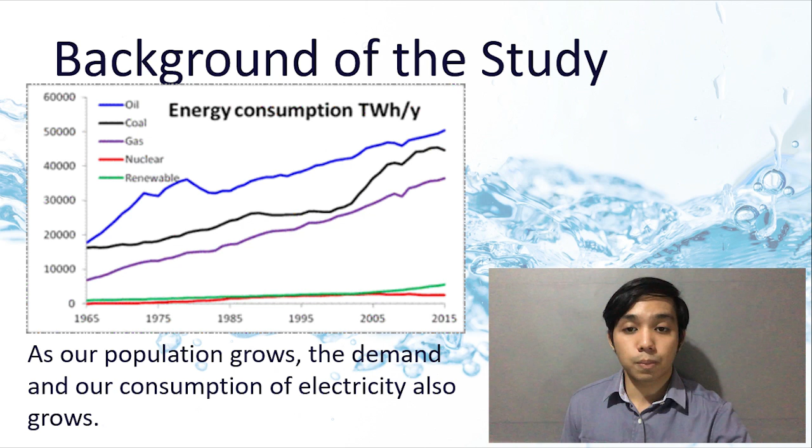As we all know, Earth's resources are limited, and as our population grows, the demand and our consumption also grow, and eventually, we will reach a point where these resources will no longer be able to meet our demands. One example of these finite resources are fossil fuels, which are the world's primary energy source. As you can see in the figure, gas, coal, and oil, these three are all fossil fuels, and they make up roughly 80% of the world's energy sources. Not only are these fuels being depleted, but they are also very polluting to the environment.

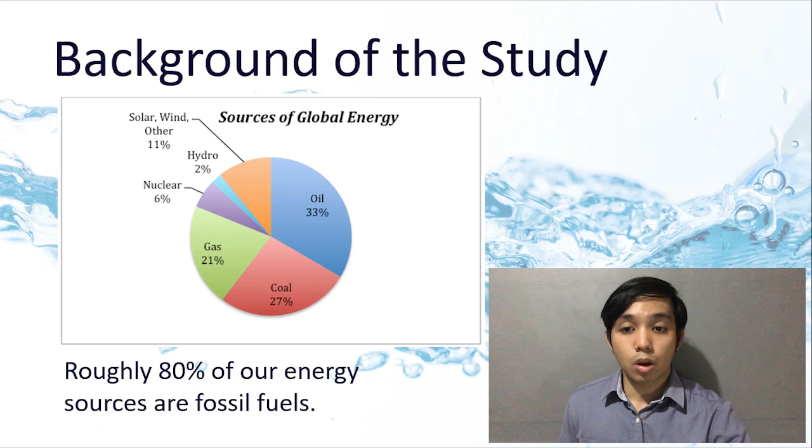Fortunately for us, we have other alternative sources of energy, such as solar energy, wind energy, and water or hydropower, which brings us to why we chose this topic. As engineers, it is our duty to develop ways to power our lives without damaging the environment and to avoid the impending depletion of our resources and find alternatives. One way we can achieve this is by utilizing hydropower. Hydropower is a clean fuel source. Electricity is generated by the flow of water, therefore there's little to no air pollution or emission of carbon dioxide. With that being said, it is an eco-friendly energy source.

It is also an efficient source because it converts about 90% of energy into electricity as compared to burning fossil fuels in which only around 50% of energy is converted. It is also renewable. We all know that water goes in a cycle on Earth, so it replenishes itself naturally. These four are only a few among other countless benefits of hydropower.

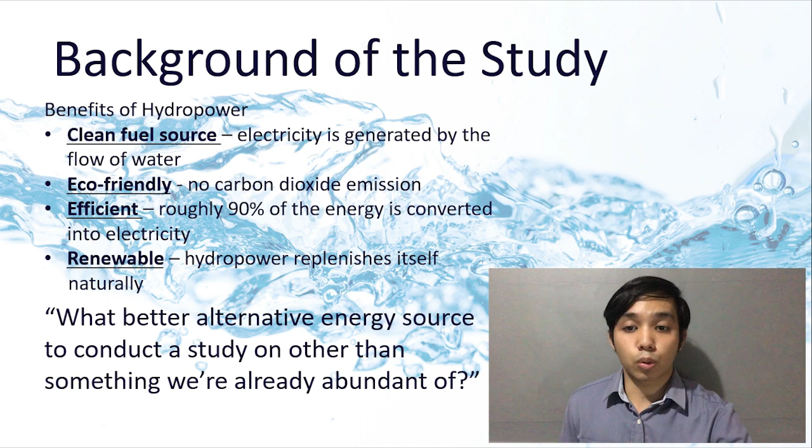In relation to our country, since the Philippines is an archipelagic country composed of thousands of islands, we are surrounded by numerous bodies of water. So, my groupmates and I thought, what better alternative energy source to conduct a study on than something we're already abundant in? We have lakes, rivers, and other bodies of water scattered throughout the country, so we decided to conduct our thesis on hydropower.

For the objectives of our study, our general objective is to design a hydropower unit that will be able to provide supplemental and renewable electricity to the university, specifically the CEAT building. Aside from our general objective, we have three specific objectives. First and foremost, to design the conversion of water flow from a small river into electricity by turbulent hydropower. Similarly to our general objective, we aim to make the design of the hydropower unit based on our data and computations. In this part, we not only aim to determine the necessary design and dimensions of the unit, but also to determine the capacity or the power that it will be able to provide.

Second objective, to determine the sustainability of the said project by applying cost analysis. For our second objective, we will determine the pros and cons of the project, as well as determine if the benefits outweigh the costs of the project, the costs being direct and indirect costs, installation costs, maintenance costs, among others. We will also consider if there are other alternative materials or processes which will be much cheaper but will not sacrifice the quality or efficiency.

Third objective, to analyze the proper installation of turbulent hydropower. Last but not least, we aim to learn how to properly install the hydropower unit along with the proper location placement and all the materials needed for the installation. Basically, we will take into consideration every variable needed to properly install the hydropower unit.

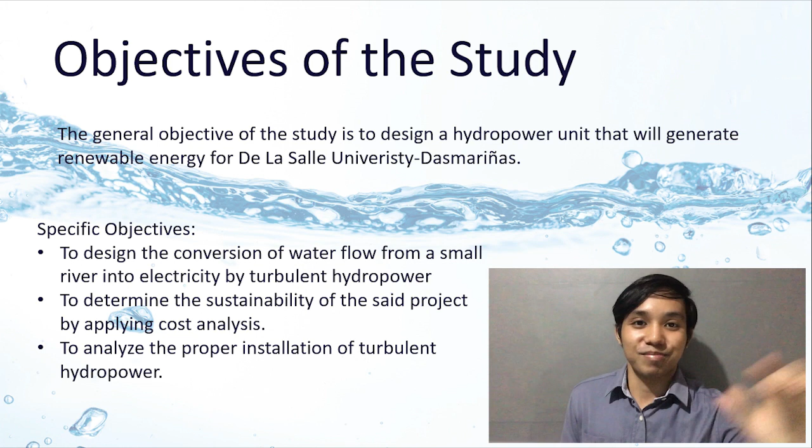Significance of the study. First, to the school. This study will benefit De La Salle University Dasmariñas by introducing the utilization of a new and innovative source of renewable electricity through the use of hydropower. Next is to the environment. This research will help the environment because water is a clean fuel source that will not pollute the air like fossil fuels such as coal or natural gas. Also, this will benefit future researchers who may wish to take up the same or a similar topic about hydropower.

To the local government, this study would benefit local government units who may wish to utilize a similar approach in supplying energy to their locality. To the community, this study will benefit the community by giving basic backup power during significant power blackouts or disturbances. And lastly, to the future generation, this study will inspire future generations to utilize eco-friendly sources of renewable energy.

So, what are the scope and limitations of this study? This study aims at the design of a turbulent system that will produce hydropower to provide supplemental power to DLSUD. This will focus on what design is applicable in order to create a turbulent hydropower and how much power will be generated based on the design.

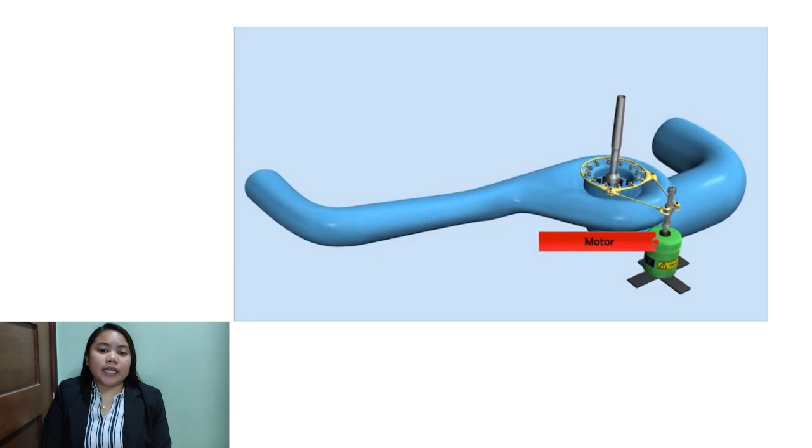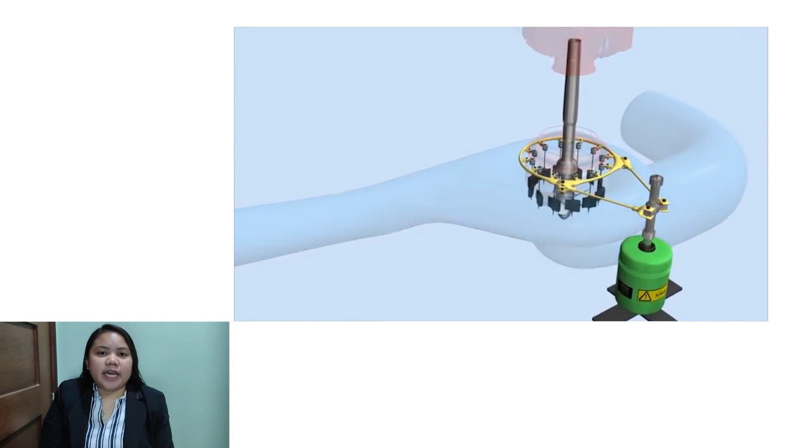The study will be conducted at the river behind DLSUD's CEAT building, where the running water will be utilized to produce hydropower. Data such as the volume and flow of the river will be obtained by the researchers themselves by measuring the river with proper equipment.

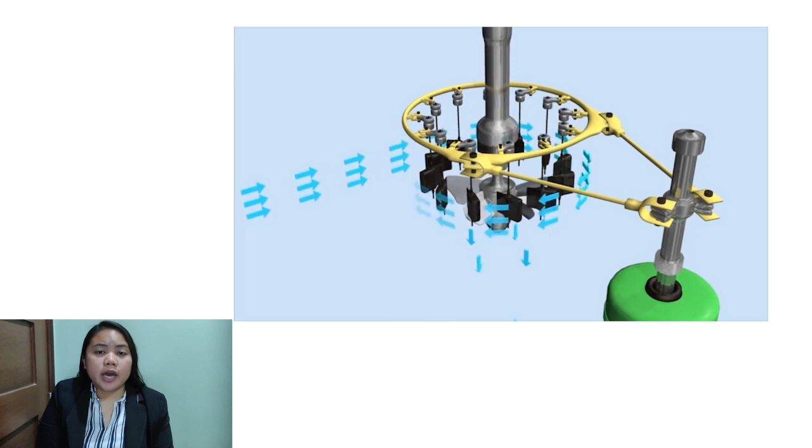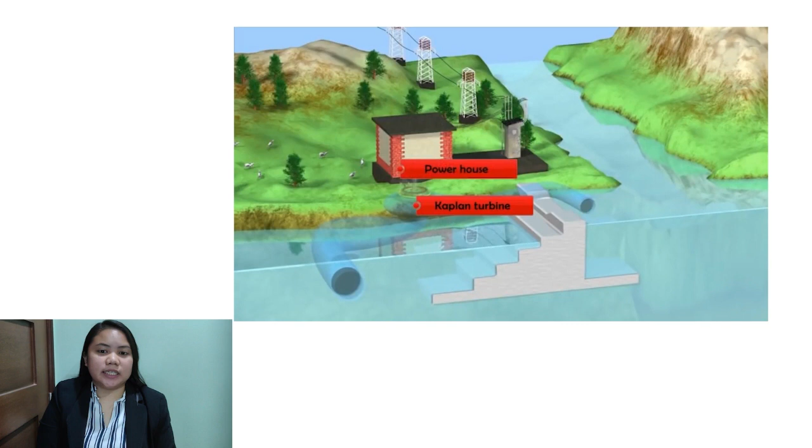The limitation of the study includes unpredictable precipitation, which may result in excessive rainwater volume and too quick a flow of water, too much for the turbine to handle. In that case, an outlet leading behind the system will be designed to release the water and allow it to pass through. The power produced will only serve as a supplement to the existing power supply of the university, not as a replacement.

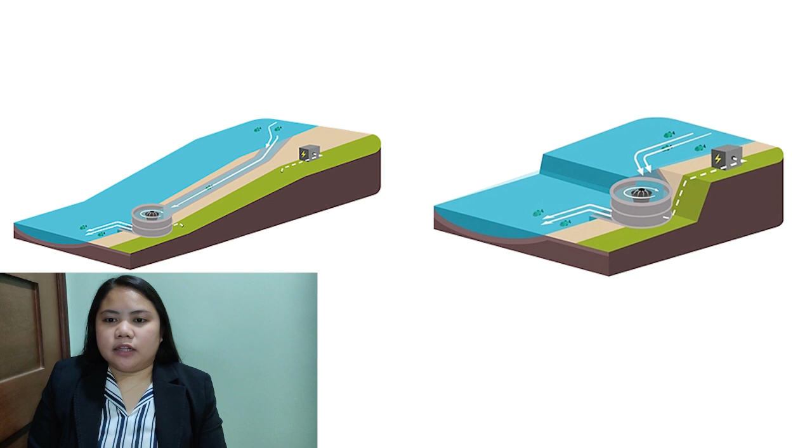So what is a damless hydropower plant? Like the name itself, it's damless - also known as run-of-the-river plants. They are thought to be ideal for energy generation for settlements near a river or stream.

The second section in Chapter 2 is Turbulent Hydropower. According to one source, this device can produce electricity from low heads, 0.7 meters to 3 meters, and can be used for mini or micro hydroelectric power plants. In developing countries, many installations were implemented worldwide because they can be regarded as an economically clean energy source without the need for fuel.

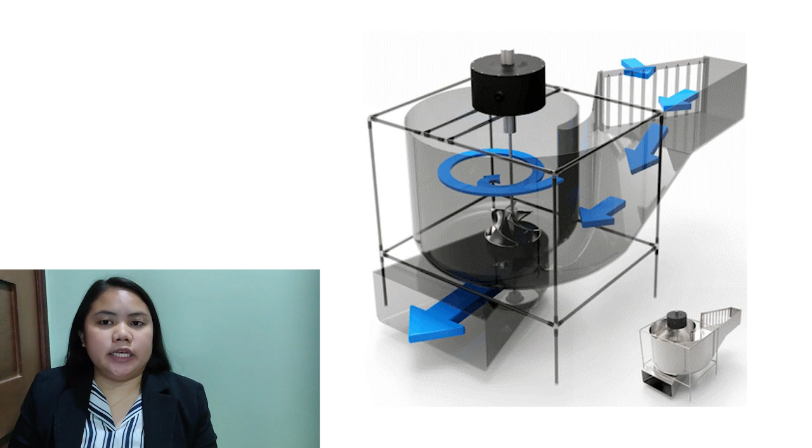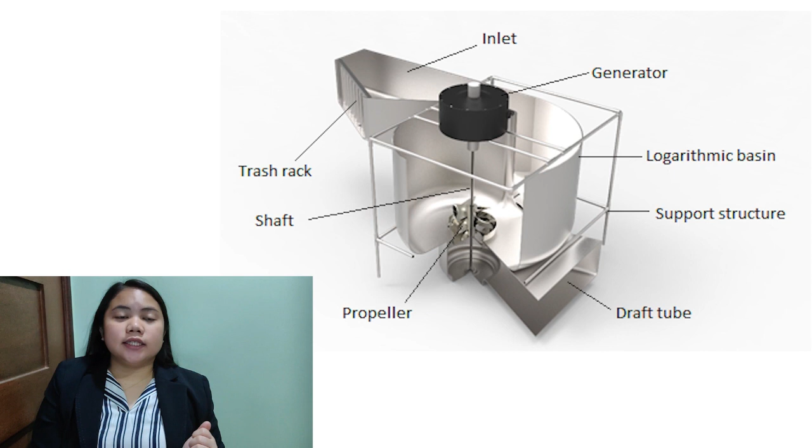The last section related to our topic is the design of turbulent hydropower. You can see here in the picture the parts of the turbulent hydropower unit: first is the trash rack, the shaft, propeller, the inlet, the generator, the logarithmic basin, the support structure, and the draft tube.

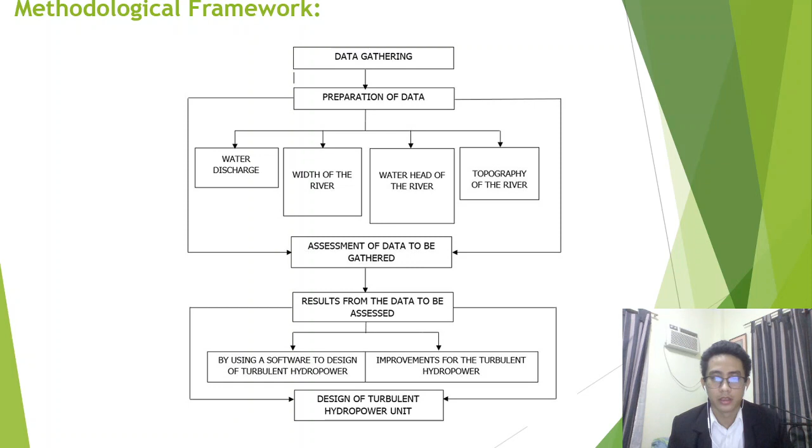So we are now in Chapter 3, Methodology. This is our methodological framework. This research study will start from gathering data to design of turbulent hydropower. Let's discuss it one by one.

For data gathering, there are 4 data that we must consider: first is width of the river, water head of the river, water flow, and lastly, topography of the river.

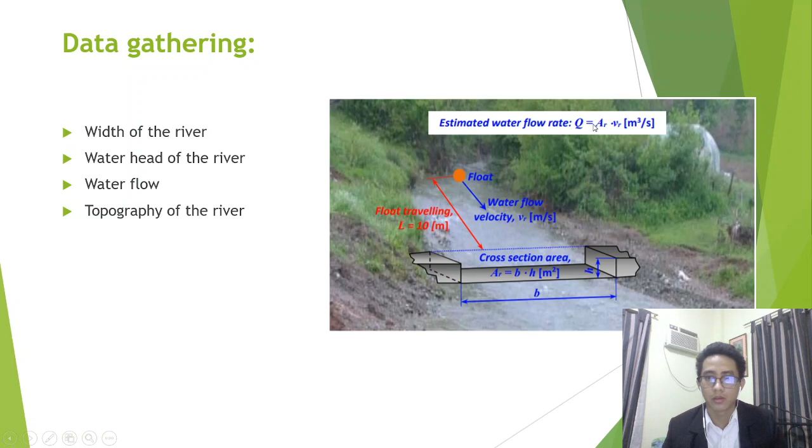For assessment of data, we have 4 processes to design a turbulent hydropower. First is water flow rate, where Q equals A times V. Next is the net head.

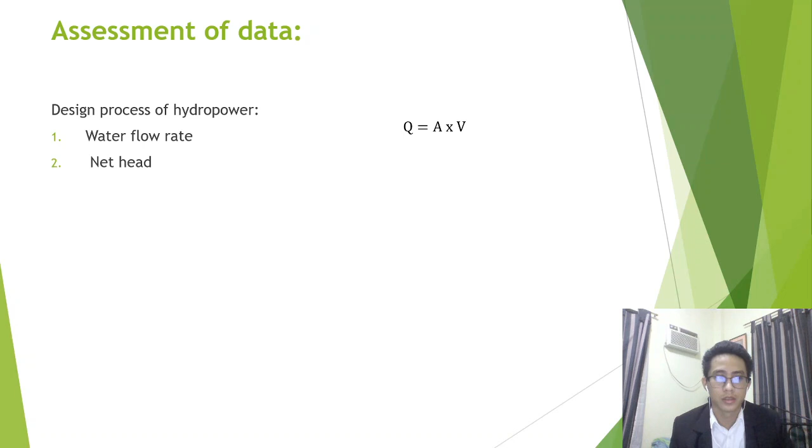The formula of net head is H gross times 0.9.

Third is the output of power - how much power will it generate? We have the formula P equals m times g times H net times eta.

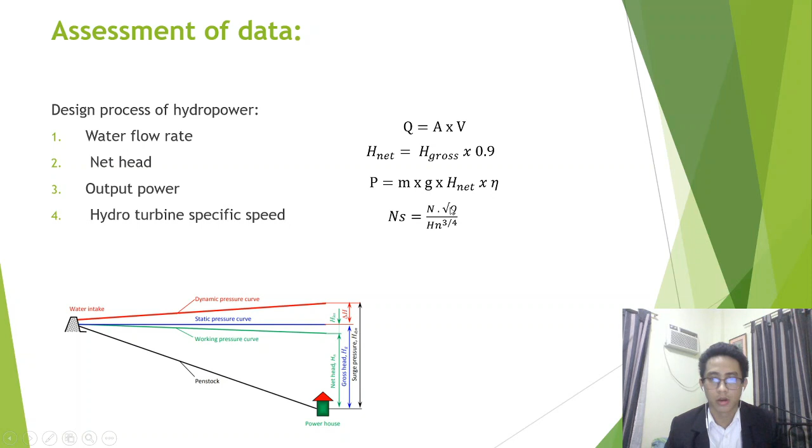Fourth is the hydro turbine specific speed - how fast the turbine will rotate by the use of water flow. Ns equals N times square root of Q over Hn raised to 3 over 4.

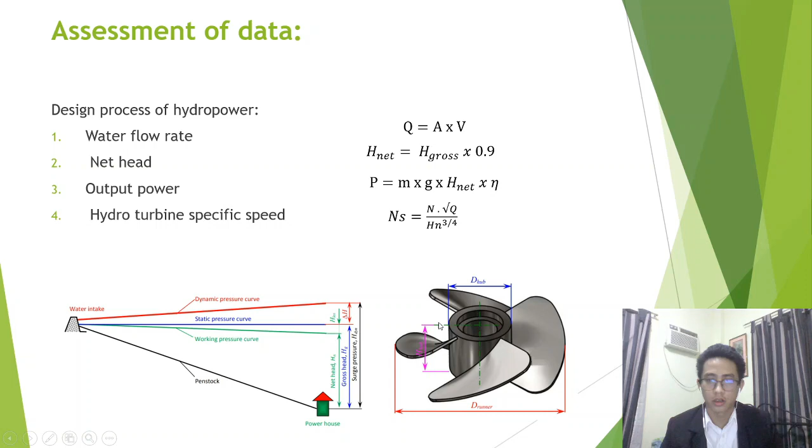We must also design the turbine. We have two parameters for designing a turbine: the diameter of the hub and the diameter of the runner. After designing, we will put it on software called ANSYS to run some tests. If there are adjustments needed to improve our design, we will remodel it and run tests again.

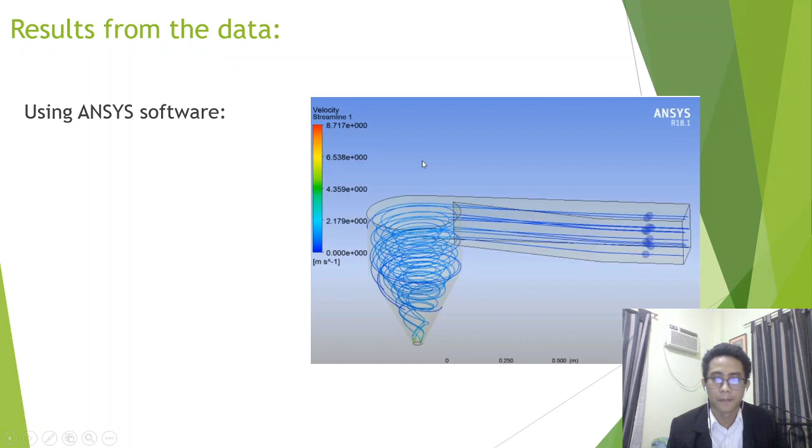After we do this, the turbulent hydropower is ready to operate.